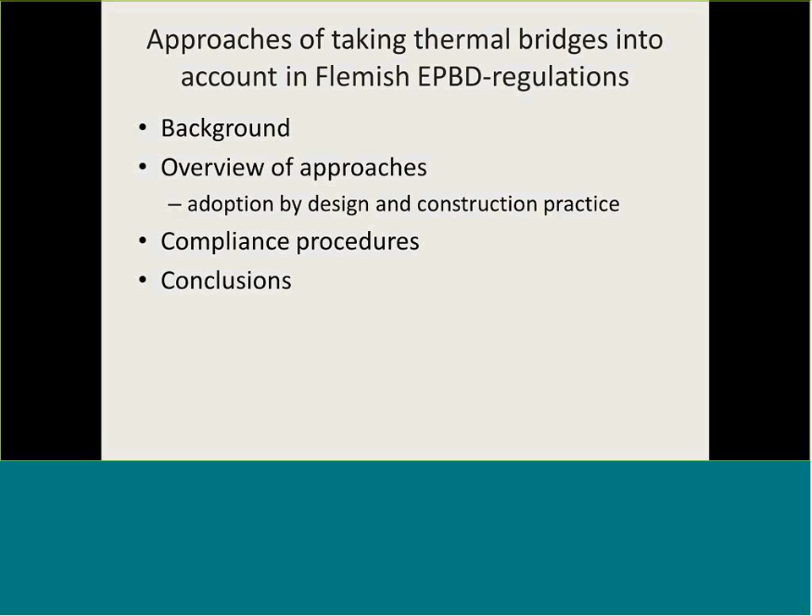First, some background. In the Flemish region in Belgium, the EPBD regulation has been in force since 2006, and based on the EPBD regulation, a number of requirements are set forward for new buildings and for renovated buildings with a building permit. The requirements relate to thermal insulation requirements, to the net energy demand for heating, to the energy performance level, which is a measure for the total primary energy use of the project. There are minimal ventilation requirements and also summer comfort requirements related to an overheating indicator.

Now, the requirements indicated in red are requirements, or performance indicators, that are influenced by the transmission heat loss through building junctions. And so to take the transmission heat loss in building junctions into account, some specific approaches have been developed in the regulatory context.

Now, perhaps it's good to have some background about one of the indicators for thermal insulation. So apart from requirements for the maximum U value of the individual building envelope components like roofs or walls, there is also a requirement for the maximum K level of the whole building. The K level is a measure for the mean U value of the building envelope. And as the graph shows you here, this mean U value depends on the volume over heat loss area of the building.

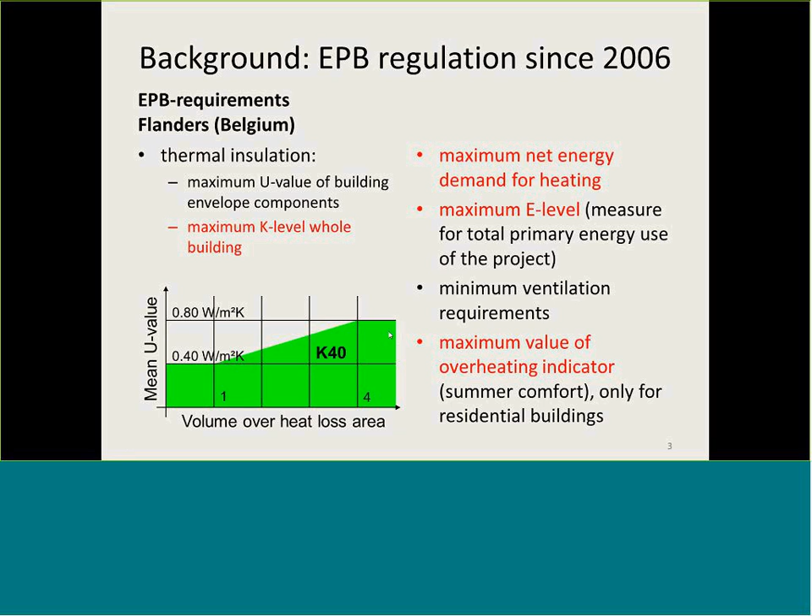Now, the influence of building junctions on the transmission heat loss very much depends on the quality of architectural detailing of the project. And the figure below shows you some results of a calculation study that we performed 10 years ago based on two-dimensional heat loss calculations. It shows the increasing K level for a number of building typologies, depending on the way the building junctions were detailed. So as you see in the business as usual scenario where thermal bridges are not excluded, the transmission heat loss may increase by 15 or 20% compared to the requirement of the K40 level.

When thermal bridges are consistently avoided, the transmission heat loss increase may be reduced below 5% for the K40 requirements still. So the influence of building junctions even increases when buildings are better insulated and have a K level that is lower than the K40 level in the current requirements.

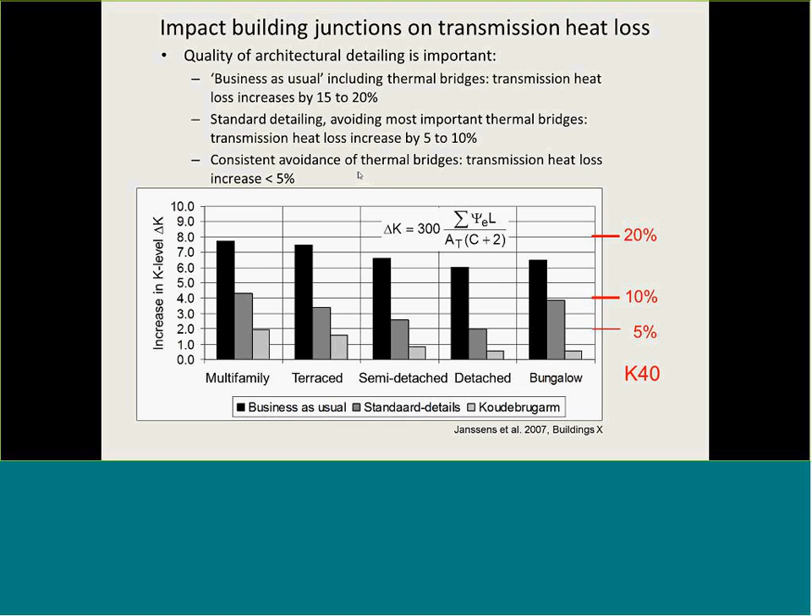So because of the importance, it is also important to define clear approaches to take thermal bridges into account. And this has been developed about 5 years ago and has been in force in the regulations since 2011. Now, because of the specific attention to enforcement and compliance in the Flemish regulatory framework, 3 different options have been provided to building practitioners to take thermal bridges into account. And you see them here in the scheme.

Either you choose as a designer and as an EPB assessor for option A, which means that you perform a detailed calculation, much in line with what Steven explained earlier. Or you choose for option B, which is a more pragmatic approach. I'll explain it later on. We also call it the method of EPB accepted junctions.

In this option, you don't have to perform a detailed calculation for those junctions that comply to some basic rules and are therefore EPB accepted. And in the calculation of the project, then simply a fixed addition of 3 K-level points is added to the total K-level of the project.

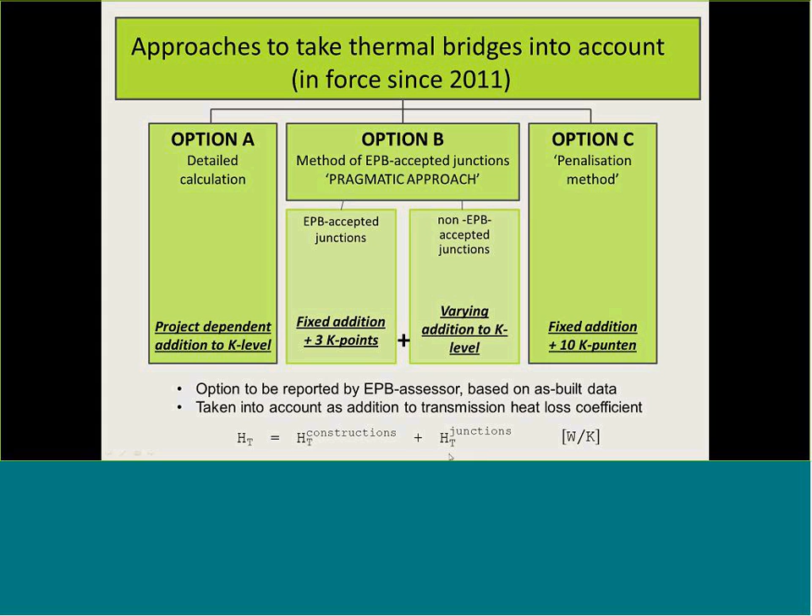Now I'll give some more information about the compliance, but it's already good to know that the option that is selected needs to be reported by an EPB assessor based on as-built data, by selecting this option in the EPB software, and the effect of thermal bridges is then taken into account as an addition to the transmission heat loss coefficient by an additional term related to building junctions.

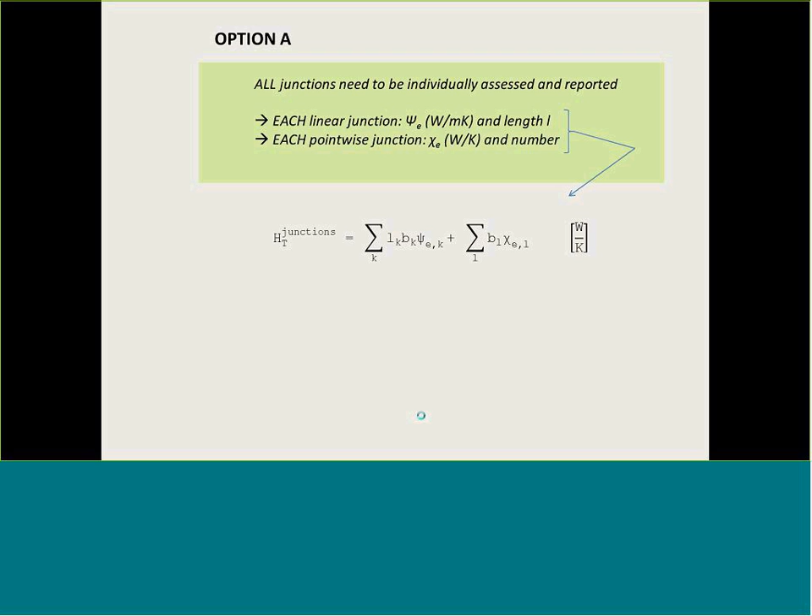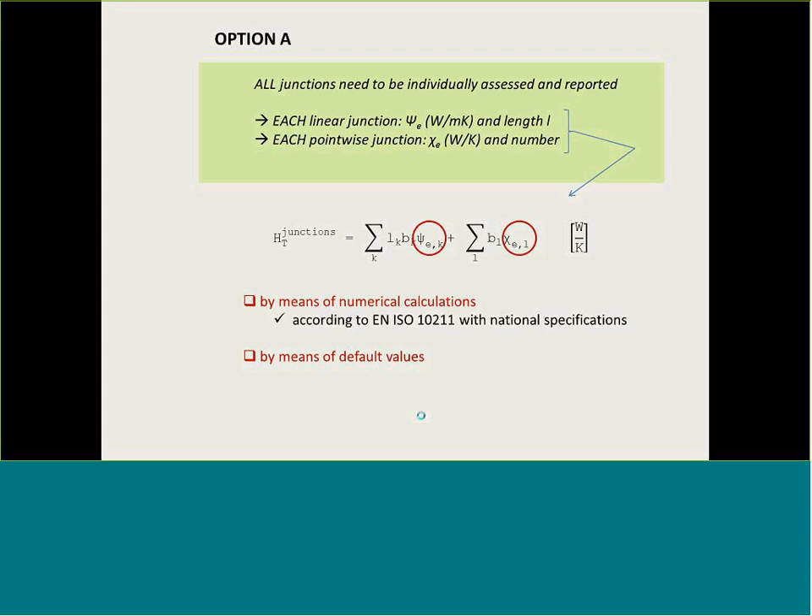Okay, a quick word about the different options. So as I already told you, in option A, a detailed calculation is needed. So for each linear junction, you need a linear thermal transmittance and the length. And for each point-wise junction, you need the point thermal transmittance and the number of point-wise interruptions. You can use numerical calculations for this based on the European standards, or you can use default values, which are also given in the regulation.

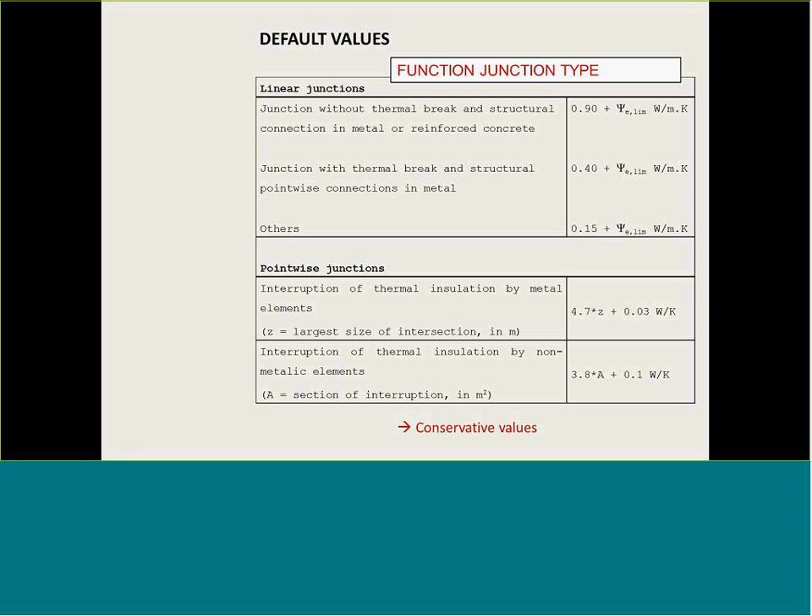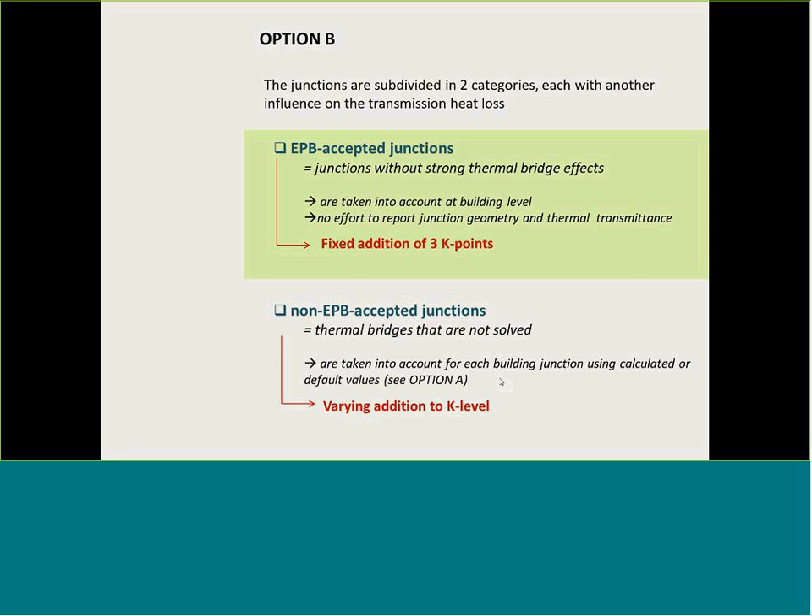Now a word about the EPB accepted junctions. A junction is EPB accepted when it fulfills one of three basic pragmatic rules. Rule 1 states that you have an EPB accepted junction when at the junction the two insulation layers in the two components that are joined in the junction overlap with a minimal contact length. Rule 2 says that you also have an EPB accepted junction when you have an insulating element inserted in the junction, which ensures the continuity between the insulation layers of the two adjacent components.

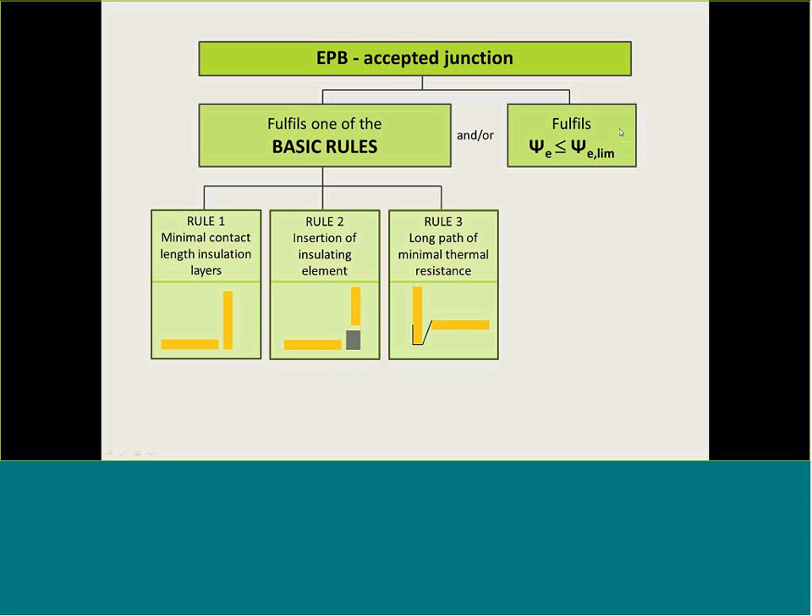Or a final rule, Rule 3, says that you have an EPB accepted junction when the path of minimal thermal resistance, which may still be present in a thermal bridge, is long enough. The path of minimal thermal resistance between the indoor and outdoor environment needs to be longer than 1 meter. So these are three descriptive rules. But apart from that, you may also show that you have an EPB accepted junction when a calculation shows you that the linear thermal transmittance is lower than a certain limiting value.

These are descriptive rules, but they are described in a more detailed way in the regulations in order to allow for compliance checks. For instance, for basic rule 1, the minimal contact length is specified both in an equation and graphically, as you see here. So the contact length should at least be the minimum of half of the insulation layer thicknesses, or half of the frame width in the case you have a window wall connection. These performance-based specifications are also included in the regulations for basic rules 2 and 3.

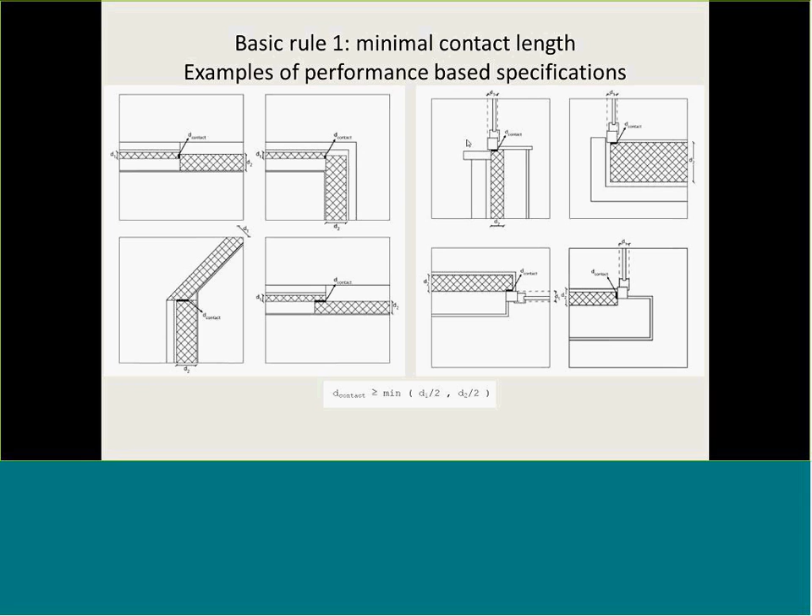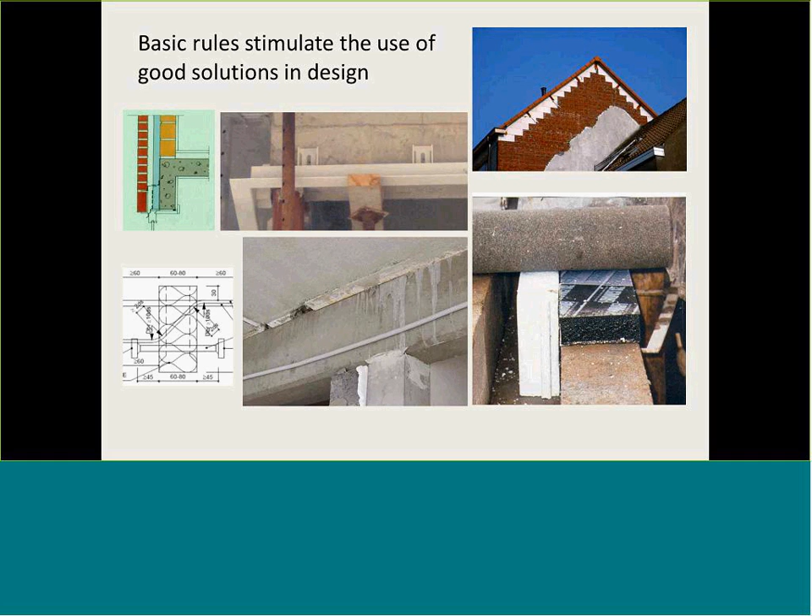Now the descriptive rules mainly aim to stimulate the use of good solutions in design by encouraging continuity of thermal insulation at building junctions, for which you see a number of technologies of thermal breaks in these figures. The descriptive rules also have the advantage that they are easy to apply in design and to check visually.

You see here, for instance, two ways of applying basic rule 2, where an insulating element at the left-hand side is inserted at a foundation junction with a cellular glass block supporting the inner masonry leaf, for instance, and connecting the wall insulation layer and the insulating screed in the floor. And at the right-hand side, you see a similar example of the junction of an insulated sloped roof and an insulated cavity wall, where you have continuity of thermal insulation at the connection.

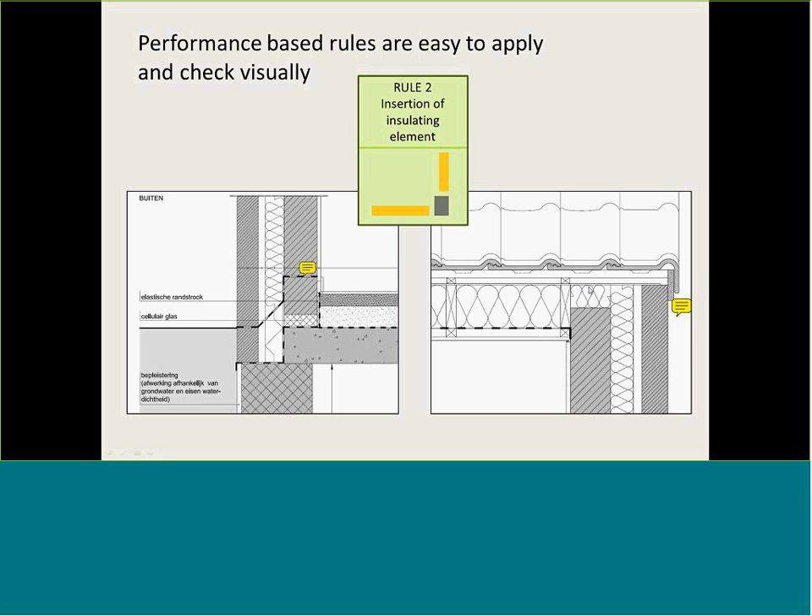That's about the descriptive rules in option B. Apart from the descriptive rules, you may also show compliance by using two-dimensional calculations. And for this purpose, the regulations list a number of limiting values for linear thermal transmittances, which are a function of the geometrical typology and of the technical feasibility.

For instance, you see here an overview of a number of categories taken into account in these limiting values. And because of the geometry, limiting values at exterior corners of junctions, for instance at roof eaves, have another value than the limiting values at interior corners.

For instance, the roof junction between a flat roof and an upper wall has another value. What I failed to say before, but which is clear over here, is that in the Flemish regulations, the linear thermal transmittance calculation is based on exterior dimensions, which is shown in the index over here.

Now, this option of showing that your junction complies with EPB accepted junctions is mainly present in the regulations to allow building manufacturer companies to develop product documentation based on this EPB accepted junctions method.

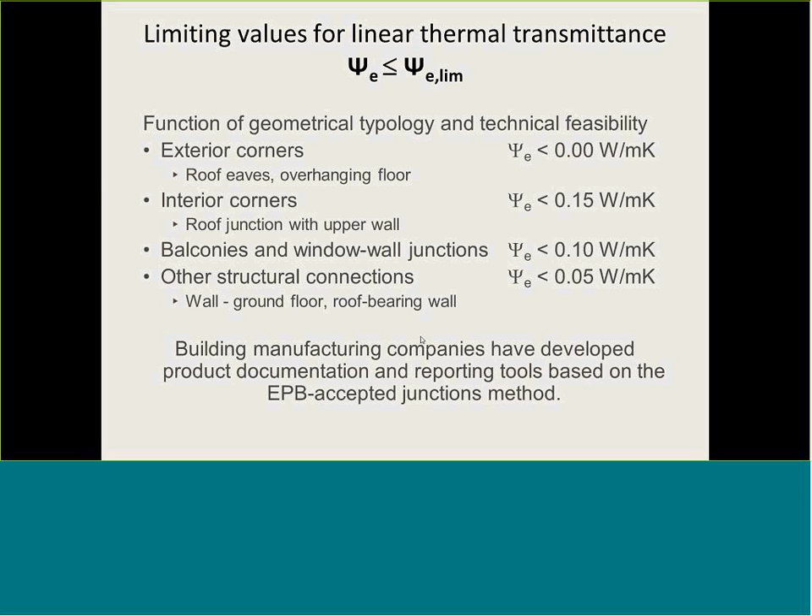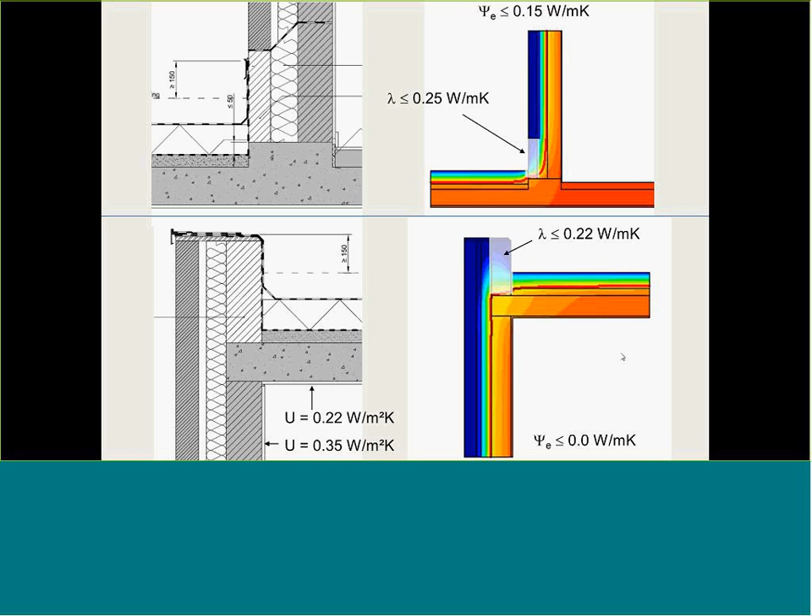The thermal bridge or the building junction atlas of the manufacturer states then that the thermal conductivity of this block should be lower than 0.22 watts per meter Kelvin in order to meet the limit value which applies to this type of building junction. So this information may be used by designers and by EPB assessors.

This is another example of product documentation that is specifically developed by product manufacturer companies to create information about thermal transmittances, in this case point-wise thermal transmittances, that may be used by EPB assessors in reporting the EPC results.

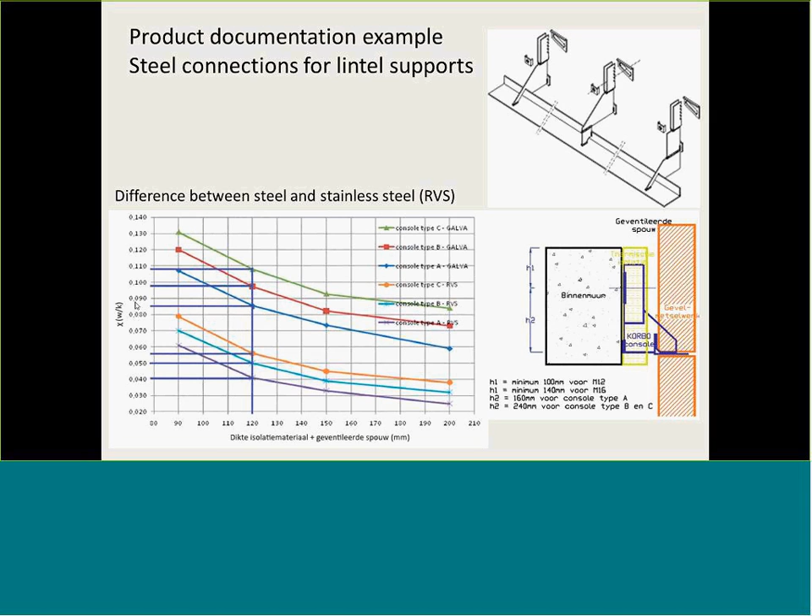These are examples of steel connections for lintel supports, where depending on the type of lintel support, the type of steel of which the lintel support consists, and the thickness of the cavity that is crossed by this support, the different point thermal transmittances are given in this figure, and they may be used by the designers and EPB assessors. A word on compliance procedures.

In general, the EPC assessment in the Flemish region is done at the moment of completion of the works by an EPB assessor who creates the necessary input in EPB software and uploads these results to a database which is managed by the regional authorities. And in case requirements are not met, the authorities charge the builder with a fine which is proportional to the size and severity of the error.

This is in general, so this applies not only to thermal bridge calculations, but to all types of elements that have an effect on the requirements. Now, related to thermal bridges and building junctions, it is the EPB assessor who selects one of the methods to take thermal bridges into account and who collects the necessary information to make the assessment.

When thermal transmittance values are needed, they need to be calculated according to the specifications for validated numerical calculations, which are based on the European standard ISO 10211. And in fact, anyone who can demonstrate conformity to these specifications may perform the calculations.

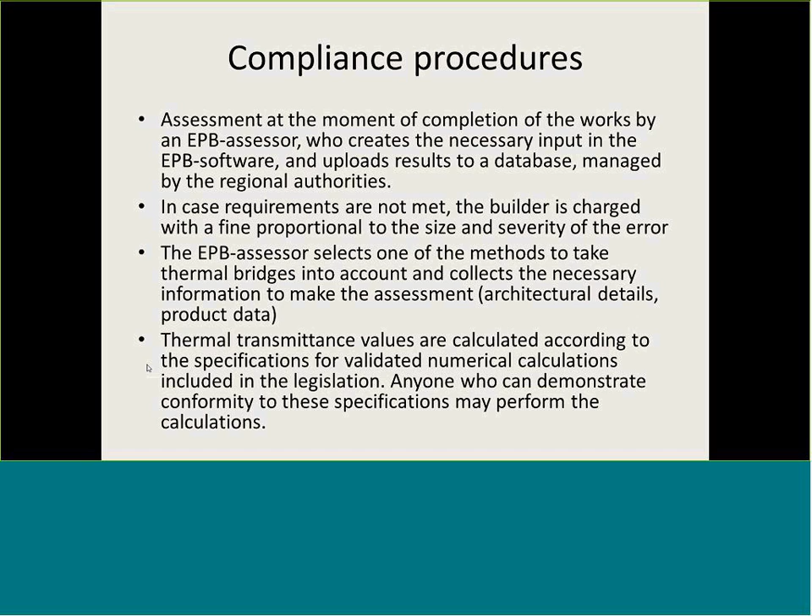In conclusion, we have different approaches to take thermal bridges into account in the regulation. This has been in force for 5 years, and we see that these approaches have increased awareness of good thermal detailing, both in building industry and in design.

The effect is clearly visible on construction sites. The use of specific solutions to avoid thermal bridges has clearly increased when you take a look at construction sites. So you see that designers make an effort to follow these descriptive rules which are laid out in the regulations. And finally, the EPB approach has also stimulated the development of more specific guidelines, web-based tools, and better product documentation by the building industry.